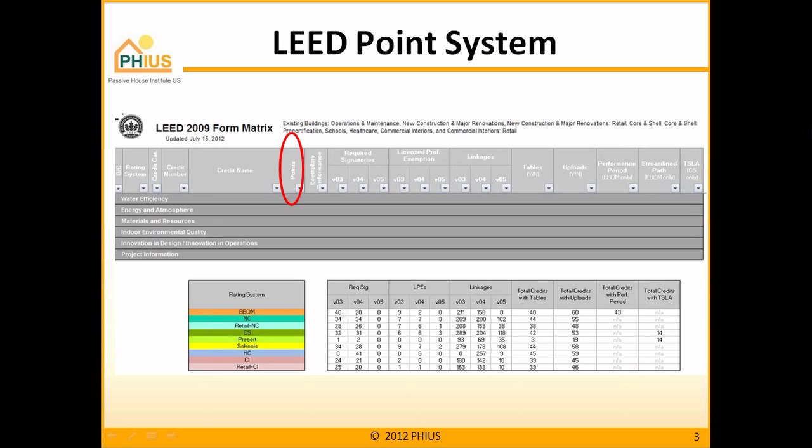With that said, this is of course why LEED likes to refer to Energy Star, and the EPA has done a very good job right here to identify this energy issue from the perspective of prescriptive guidelines. And you can see right here, they are trying to work also with performance, of course. They have both options for Energy Star version 3, but it is definitely a hybrid between a performance and a prescriptive path. So this is where Energy Star kind of stopped with the version 3.

And then I'm not sure how many of you are actually familiar with the path that Sam Rashkin, who's now in the Challenge Home program at the DOE, has taken. He was one of the main architects of the Energy Star program. And as we all know, it started very modest with the early versions of Energy Star, and has worked up to Energy Star version 3, which is actually already quite up there in terms of what they are requiring.

And in Sam Rashkin's mind, at least that's what he told us when we first started talking with him about this idea to put Passive House on the map. Basically, our idea was, well, there are your Energy Star versions, and you're trying to ratchet this up from each revision to the next. Could you not already put Passive House all the way out there, on the other end, like the reach code, just giving people the idea that there might be another option to not do this incremental step improvement, but to go all the way over to Passive House right away.

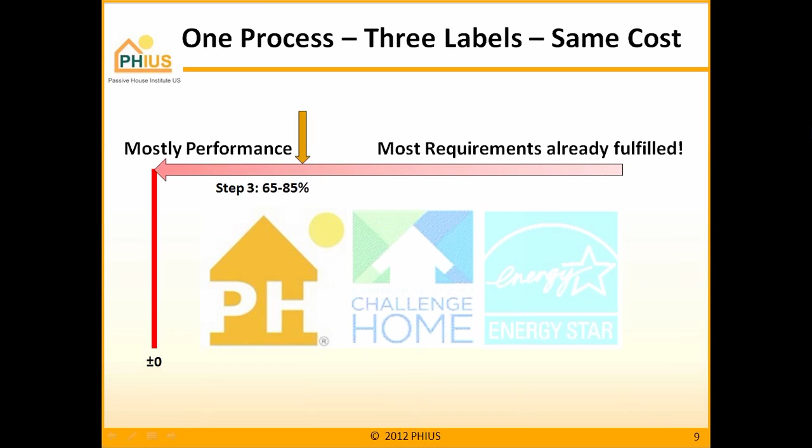Okay, so very quickly, passive house certification. This is our step-by-step process right here, and the cost for the certification stays exactly the same: 25% off for alliance members, $1,300 for small homes and $1,850 for larger homes. And if they are larger projects, it just scales up accordingly. So for an alliance member, that is basically about a $1,000 review cost for the design review.

And now we're getting into the checklist. So Adam, I'm going to get to this in a second. It's going to be on the list very quickly. So these next couple slides highlight the Energy Star for Homes checklists, as well as the additional requirements of the Challenge Home program. And you can see right here the yellow areas that are highlighted. Those are the ones that we might need some additional exceptions for because of passive house convention. We might not be able to fulfill this.

Now, this one right here, the first one, that was the first topic that we had discussed with the DOE, the high performance fenestration, and you might have heard about this, the Energy Star requirements in terms of heat gain coefficient. And of course, if that's a requirement for this partnership, that all passive houses now can only have solar heat gain coefficients of 0.3, then of course this deal would have been dead in the water. Turns out that's not the case. I have another slide here a little bit further down; we'll discuss this again in a little bit more detail. So that was an easy one to solve. We found that was not the case at all.

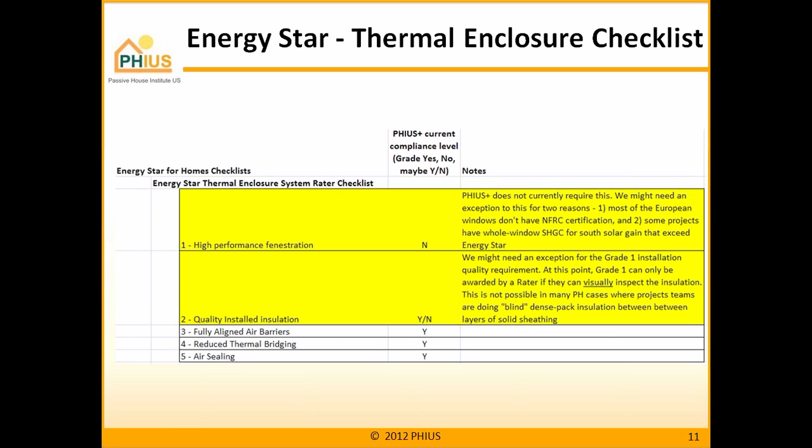So as we move on to the HVAC system contractor list, we ran into the next problem, and that's what Adam was curious about, and that is the ASHRAE 62.2. And at first I thought, oh no, not again. Those who were at Silver Spring last year remember there was a presentation, and we reported on our interpretation request with ASHRAE on whether Passive House indeed does not meet 62.2, and after 8 months of waiting, the committee actually did get back to me and said yes, you're correct, Passive House does not meet the 62.2 requirement. And since then, we've heard from a lot of design teams that they've run into snags with code and other verification agencies that were just not happy with the low flow continuous ventilation in a designed Passive House kitchen.

So at first I thought, oh, well, now we're stuck again. But then we started the discussion with Sam Rashkin, and by now we've inquired with Building Science Corporation, with some other mechanical engineering experts, and with a few other committee members of ASHRAE 62.2. It actually does not seem to be a hurdle that we cannot overcome. People are generally very willing to look at it. Now that's the good news. It actually put it on the table. Last year in Silver Spring, we concluded we can't do anything about it. They told us we have to put in an application to change 62.2 to be recognized, and that would take forever, so we would never get anywhere anytime soon with that.

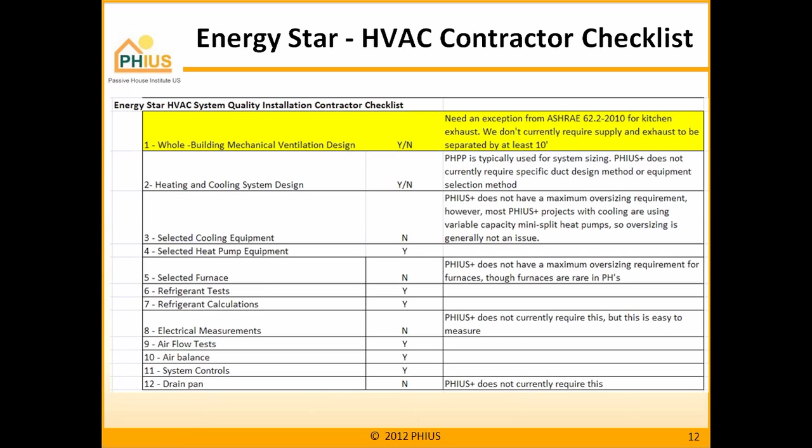we're oversizing likely already. These are all points that we probably will have to keep working on as we start our first prototype joint project. But this will not prevent anybody from getting certified. So these are just points in motion a little bit. Selected furnace, I thought that was a funny one. As John noted here, well, furnaces are rare in passive houses. Let's go on to the next one. This is all pretty easy stuff.

So the next one, this is what we're haggling with the Challenge Home people about. They say, why can't you just put a giant exhaust hood and vent directly to the outside? And then we're right back to making another hole through the envelope, having to have a makeup system, so on and so forth. And they understood that argument, and so this is just another point that relates to the ASHRAE 62.2. So we are on our way to progress there.

Then the Energy Star water management system builder checklist. I'd like to say a few words about that one. We are not requiring any of that stuff right now. And I have to say that through a whole bunch of projects now that we've seen and also testimonies coming back from building science experts from the more established crowd at Building Science Corporation, as well as summer camp this year, they came to me and said, I've seen this really beautiful passive house project, and we really commend what

you guys are doing. But it really seems to us that the passive house people are so focused on meeting the thermal requirements that they almost forget about the water management layer. And of course, that rings all kinds of warning bells. If you have a super insulated loose fill wall cavity and you have bulk water leakage, that's a giant problem, and I personally feel that we have not given it enough attention. So I'm very happy having this water management checklist added, and that's nothing off the back of the designer, because that's basically the rater who's going to do that anyway. So that's a free benefit that we're getting from this one.

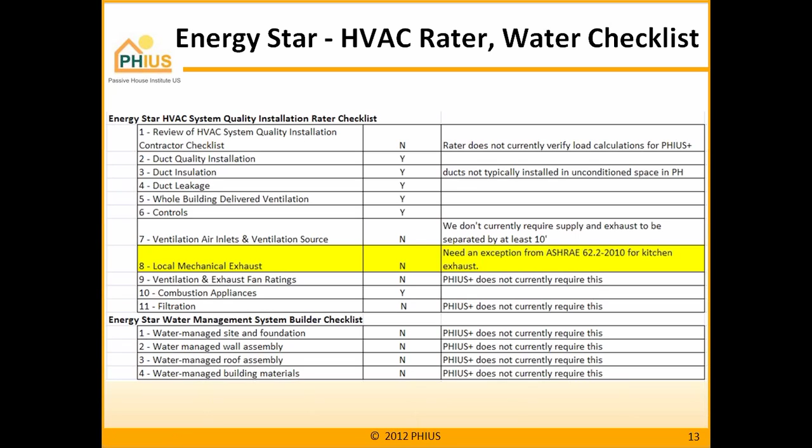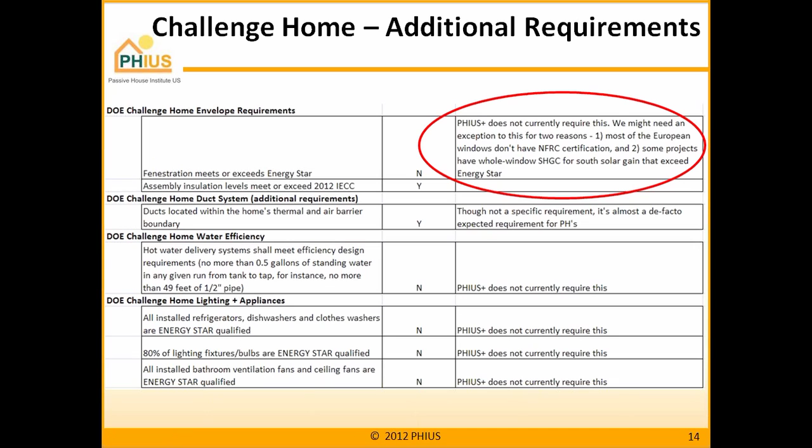And then, of course, pretty much we have to specify Energy Star lighting and refrigerators, dishwashers, so on and so forth, because we need to meet our source energy requirements. We need the most energy efficient equipment. So this is no sweat off our backs either.

So essentially, in regards to the solar heat gain coefficient issue, we have concluded that there really should not be any problem for PHIUS+ projects. Because Energy Star requires that you prove that you meet the 0.3 solar heat gain coefficient with a weighted solar heat gain coefficient of all orientations.

For climate zones 4 and higher, you don't have to worry about that anyway. You can use whatever solar heat gain coefficient. So essentially, for most passive house projects, it should already be a non-issue. So for climate zones 1, 2, 3, this is where it gets a little bit more interesting. At that point, as it says right here, you have to show that you're meeting the weighted average of 0.3 solar heat gain coefficient for all orientations.

So you have a choice to have higher solar heat gain coefficient on the south, either through this weighted average path, or the next option right here, you have to associate a solar thermal storage capacity with it. And we're going to try to rephrase this with the DOE a little bit. It would be great if this could be formulated differently, as we see this in PHPP, like the overheating limit. So if the modeling tool says the overheating in the building or the difference in temperature is only like 2 degrees F, that you're going to be okay, that your combination of thermal mass is actually

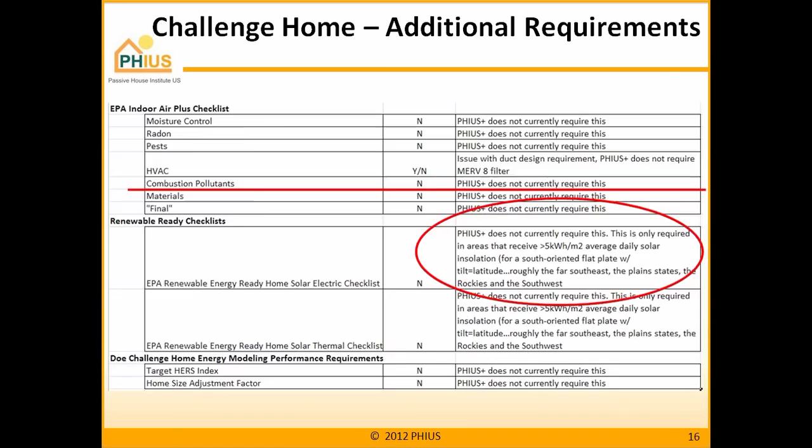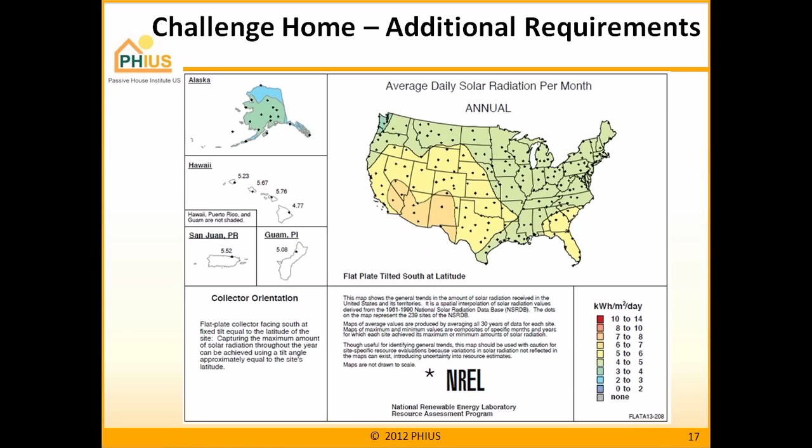And then this is one of the last slides right here before the conclusions. This is our current on-site quality assurance and the design review. These are the above and beyond points that PHIUS+ is already doing beyond the DOE Challenge Home. The Challenge Home does not require a design review, so that would be our pre-certification right here. And again, as we've seen, it's hugely valuable, not only in accurate balancing, but also accurate system sizing, and

mostly what we're seeing also the wall assembly design. Is the hygrothermal performance actually working out? There's still a lot of confusion out there, and there are many, many projects that we sent back, and we would say get a professional WUFI analysis, because we're not sure that the wall will actually be condensation-free and risk-free in that particular climate. We have additional ventilation distribution requirements, the airflow testing to each room and so on and so forth.

That's beyond the Challenge Home. The thermal imaging that we're requiring is beyond it. We have more involved blower door testing, depressurization and pressurization. More attention to the duct between the ventilator and the envelope in terms of being condensation-free, and that whole situation being high quality; that is not addressed under the Challenge Home.

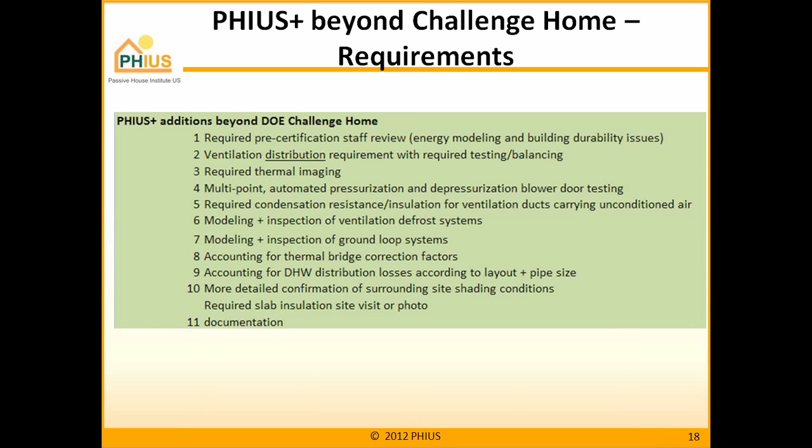And I'm going to stop talking here, just quickly a couple of conclusions, and then we can go to the discussion. But still super excited about this partnership. Essentially, we were already doing it. Sure, we can sign on to this. They're bringing to the table a few really great improvements. We were already set up through our PHIUS+ with the RESNET rater. We are living up to the third-party verification requirement and that part of quality assurance of a project. We are also set up to provide a HERS index,

which as of right now is still the language to talk to incentive programs and to mortgage programs. And best of all, for the certification process, it does not make any difference. There are a few things that we might need to shift or add, but there's no additional significant work involved. And the benefits of all this: we have huge market recognition. Additional, that's kind of understating it here.

We have a better program because of these additional environmental requirements, which PHIUS always suggests, but there are no real standards that hold us to doing it. So I think this is a very good thing that we have this now. With triple label recognition: there are some areas that give incentives on Energy Star. So what good is your PHIUS if you only get incentives for Energy Star? So either you spend your time arguing that PHIUS is just as good, or you just get basically the Energy Star label with it.